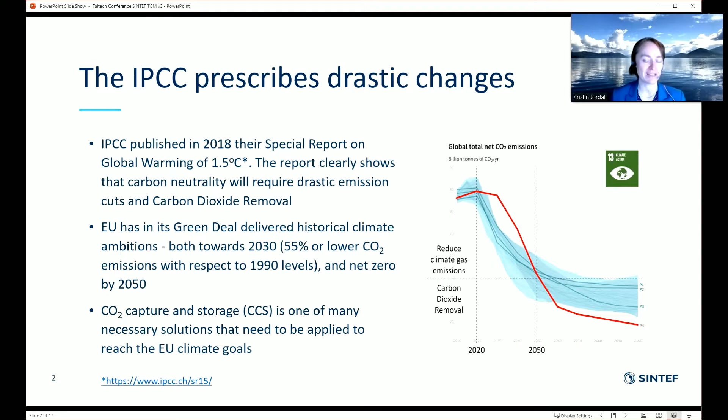One alternative that's been studied for many years is oxy-fuel combustion capture, where you modify the air to be oxygen instead when you burn, so you don't have all the nitrogen in the process. A little bit there will be. That means a combustion product of water, carbon dioxide, and some excess oxygen. You also need to recirculate some of the CO2, which makes it more complicated to control temperature. Then when you separate the CO2, the separation process requires less energy, but the oxygen separation requires energy. So it's about the same, I would say.

There are differences, but then the third pathway is what's called pre-combustion capture. In oxy-combustion, we modify the air, so we don't have the nitrogen. In pre-combustion, we modify the fuel instead. We reform if we have a gas, we gasify if we have a solid fuel, to produce a syngas, which is largely CO and hydrogen. When you have shifted it, you can remove the CO2 before the combustion, and you burn. Traditionally, you talked about burning this in a gas turbine. You need a low NOx gas turbine. These are still under development. But technologies that were developed previously for pre-combustion, you can also use now for hydrogen production with CO2 capture from fossil sources.

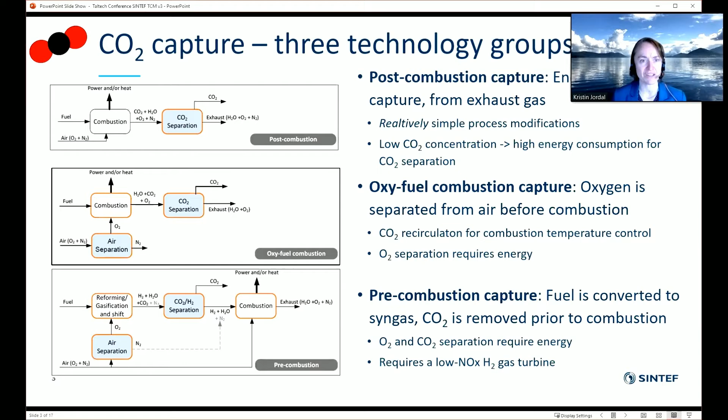And this talk will mainly be about post-combustion. We see also that post-combustion capture is really the most mature technology and what's largely being applied now. There is a project on oxy-fuel in cement industry, and there are a few others, but it's mainly post-combustion that's moving forward towards industrial scale now.

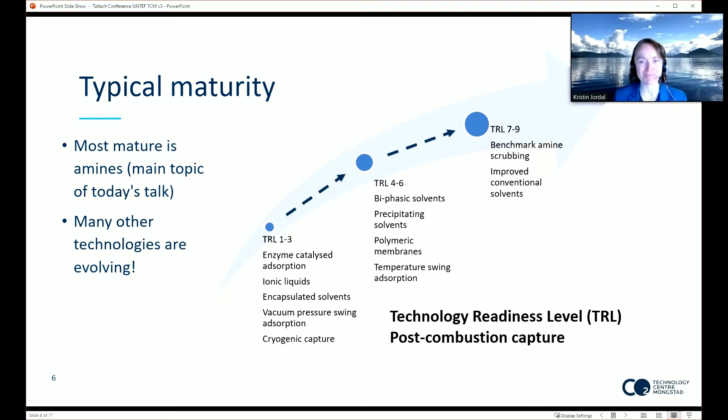So there is a lot of R&D that's been done already that's ready for harvesting, I would say, for those who are moving in this direction with their industries and to comply with regulations that are coming. A little bit more about amine capture. This is where you absorb the CO2 in a liquid, you heat it up and you desorb it again. This is the most mature capture technology of all, or the family of different amines. And several of these technologies have already been tested at TCM. Freddie will talk more about what they have done at TCM.

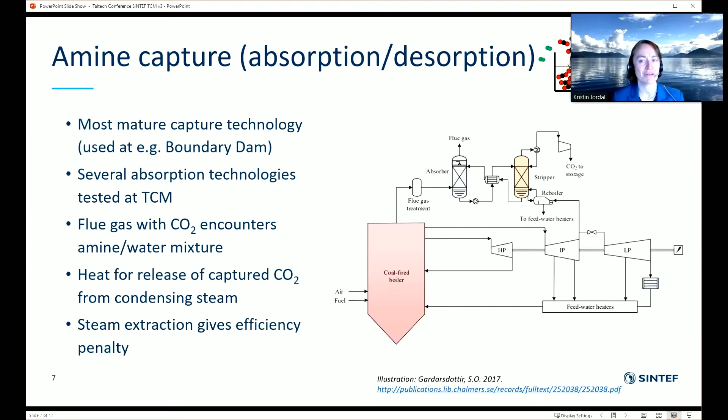And for my last slide, to show a little bit more about what lies behind that we say that CO2 capture is commercial with amines. There has been a lot of R&D going on for many, many years. We knew that this worked already before, but to really get it ready for power plants and the flue gas specific environments that we have for the industries that emit CO2.

And then we have the first full-scale power plant with CO2 capture. The CO2 capture came in operation in 2014 in Canada in Boundary Dam. For instance, we see now in Sweden that we will have a cement plant with CO2 capture, perhaps also a waste energy plant with CO2 capture operating in a few years. There are a couple of plants coming in the Netherlands and so on.

But all this experimental work always has to be accompanied, and has been accompanied, with a lot of modeling and simulation evaluation of the experimental work. So these go hand in hand, both at SINTEF, at TCM, and at many other places.

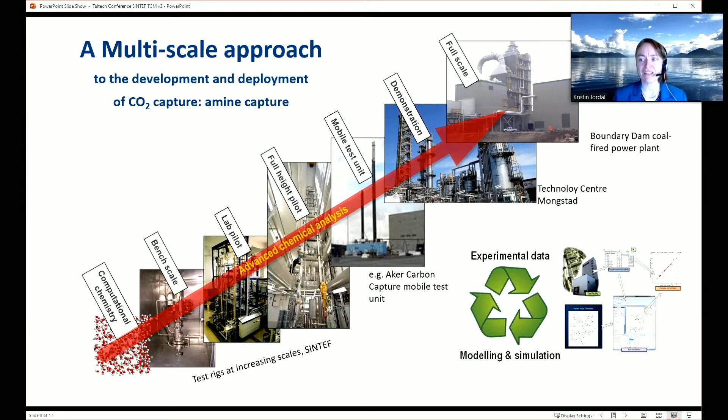Thank you, Kristin. So, as Kristin said previously, normally before going to full scale, you want to go through a demonstrator phase. Why, you may ask? Well, in reality, in the demonstrator phase, you can de-risk your site before going to the full size. How do you do that? Well, because in the demonstrator you can test the technology, you can optimize your operating modes, you can try many things and learn in a safe environment before you apply these lessons later on the real scale.

So what I'm going to do now is give you a couple examples of the lessons we have learned at TCM through the several campaigns we have run so far. And one of the main ones is that solvent hygiene is key for a good operation on your capture site. What you will see is that if you can maintain the quality of your solvent, your process will be very stable. The plant availability is going to be high.

You will be able to have low level of emissions to the environment, which is regulated by the different governmental agencies. You're going to have a high energy efficiency, which at the end of the day means that you consume less energy to capture the CO2. And overall, you're going to capture the most CO2 that you can, which is what you want to do.

You will also see that your chemical consumption will be low, and there's always some losses of solvent to the environment in the emissions. You cannot do anything about it. What you want to do is to keep it as low as possible. Why? Because at the end of the day, what you lost, you need to compensate by putting extra solvent into the system, which costs money, of course.

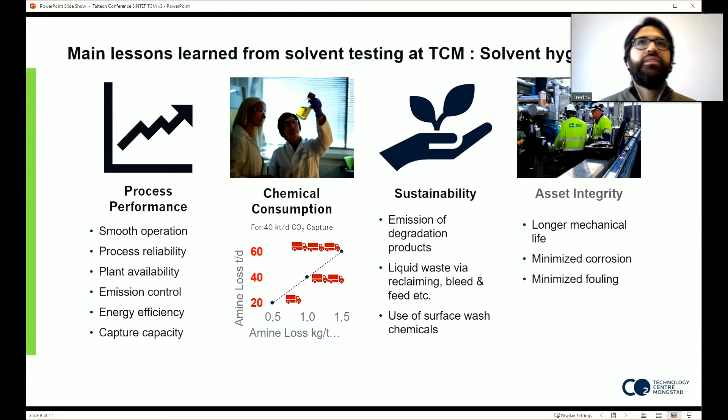If you can go to the next slide, please, Kristin. Okay, so to give you an example of that, I'm going to tell you a story at TCM. This is an actual problem that arrived on site. Let me just say first that this is the worst case scenario. This is not something you want to have in a real plant. We have this at TCM because we are built for pushing the boundaries of the operation. We want to see how far we can go in the different limits, but you don't want to have this at all.

So, solvent, it will degrade with time. There's nothing you can do about it. However, several parameters of the operation will impact the velocity at which it will degrade. For instance, if the temperature is too high, or you have too much oxygen, etc. When the solvent degrades, it's going to form some solids. We call these solids heat stable salts.

These solids will interact with your different equipment. It will dissolve the metal, causing a problem of corrosion. And then this metal will interact with the solvent and accelerate the degradation mechanism, which in turn will cause even higher corrosion. And like that, you enter a downward spiral that will end up in having to shut down the facilities for a certain period of time. And you don't want to do this. Next slide, please.

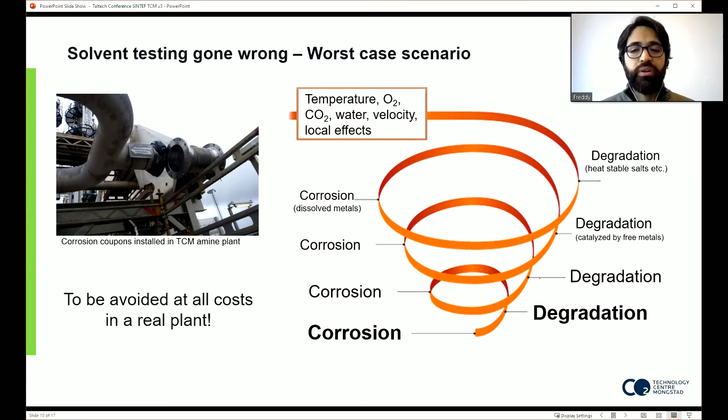So the good news is that this can be avoided, and it's quite simple to do actually. Basically, what you have to do is monitor the operation. You have to have a monitoring strategy. So first, you need to know which parameter to look at. You need to know how to measure it with an analytic technique, with an instrument, in which location you want to measure it, and the frequency.

So part of the test at TCM has been to try to find an equilibrium between all these, trying to find the optimum monitoring strategy, between very frequent monitoring, which is going to be very expensive in manpower and in chemicals, so in OPEX, and too low monitoring, in which case it will be useless. Okay, so this is the first thing to do. You have to have a good monitoring strategy.

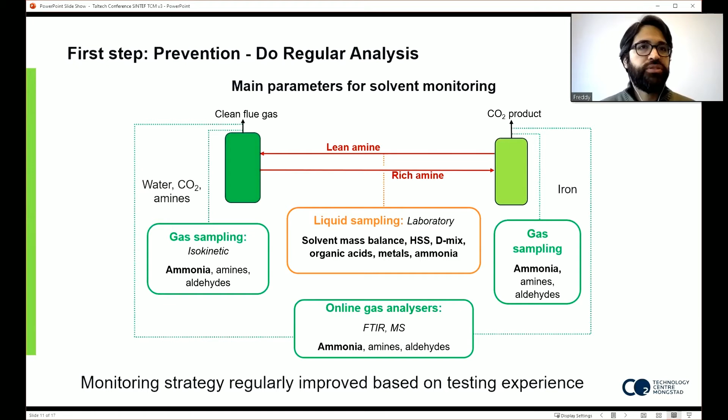Next slide, please. So let's assume that you have a good monitoring and you start seeing things that start changing. The first thing to do is just to go into your plant parameters and see if something has changed. Well, if it hasn't, maybe it's a normal degradation of the solvent. In that case, you want to take the necessary corrective measures as soon as possible. The sooner you do it, the less expensive it will be for your operation. So you start doing what we call reclaiming.

So in a nutshell, you take your solvent, you concentrate all the impurities in one part of your solvent, and this one is going to be very dirty, so you dispose of it in a safe manner. The rest of the solvent, the majority of it, will be cleaned, and you can reuse it. You can put it back into the system and just add a little bit of fresh solvent to compensate for the losses. So it's going to cost you money, but not so much.

Now, if it doesn't work, what's going to happen? Well, that's what we had to do at TCM. You need to change all the inventory of solvent at the same time, which is going to cost you a lot more money. And at the end of the day, if not even that works, you say, well, it's too late. There's nothing to do. I'm going to apply the last resort, which is a full plant cleaning. So basically, you take out all your solvent, you throw it away, you flush everything, and then you start doing chemical washing, which is basically adding some acid into the system.

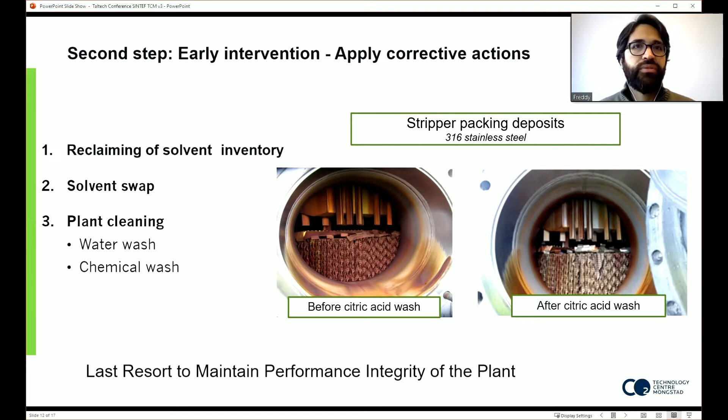And then you start asking yourself, what is the concentration of the acid I'm going to be using? Which one? Because if it's too corrosive, you're going to destroy your facilities. So this is something that has also been tested, how to do these kinds of operations. I give you some pictures on the slides of the situation before the acid wash and what we had at the end. As you can see, the difference is quite significant. Next slide, please.

Another lesson, a different one, is about the pretreatment of the flue gas. So at TCM, we have two sources of flue gas. One that we call the dirty one. This has a lot of particles in it, right? So at the very beginning of the plant, we had a very simple pretreatment of this to remove what we could, a cyclone, pretty standard, nothing fancy.

So what we saw when we started to use this gas is that we couldn't maintain an acceptable level of solvent emissions to the environment. It was even above what we were allowed. So we had to stop the operation. And we couldn't see the relationship between those two. We weren't even sure there was a relation.

So the conclusion is you need to know your flue gas very well in order to have an adapted pretreatment for your facility. Next slide, please.

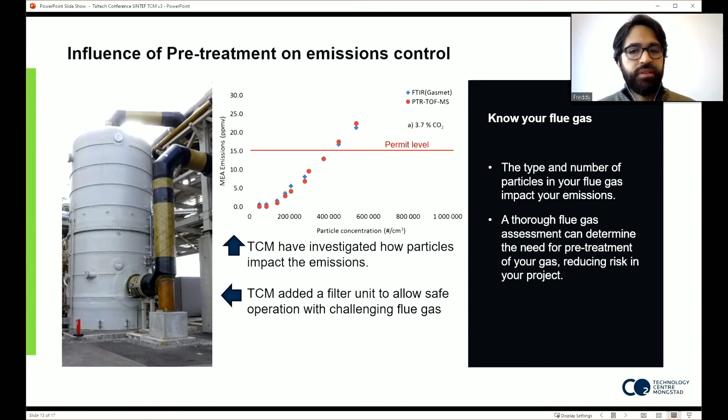Yeah, so you have seen a couple of lessons we have from TCM; there are many, many more. We have been learning this in the past campaigns. At the time, the focus of the tests was to mature the different technologies, to bring them all the way up to TRL 7, 8, 9 to be able to deploy them on an industrial scale. So for those technologies, the big chunk of the work has been done. There's still some R&D going on, but the focus has shifted a little bit.

Now the focus is more on how to reduce the capture cost. And one way of doing this is to optimize the way you integrate your capture plant with a specific industry, because a waste-to-energy plant is not going to be the same as a coal power plant. It's not going to be the same as a steel factory. So by playing with the integration of the capture plant with your application, you will improve the reliability of the operation. I'm going to give you a quick example on that. If you could go to the next slide, Kristin, please.

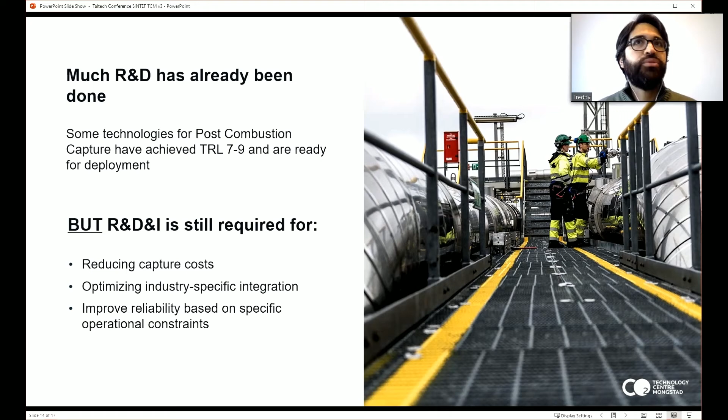So this is a power plant case. As you know, now everybody talks about putting more and more renewables into the power grid. When you do this, the amount of energy you put into the grid is going to change a lot depending on the day, if you have too much sun or too little, too much wind or too little. So you need to compensate for this because the power demand is going to be constant.

So one solution is to add gas power plants into the system. These power plants have the advantage of being quite flexible. You can turn them up and down, shut them off really fast, and they adapt to these kinds of instabilities on the grid. However, this is actually their business model. They need to be flexible.

And today, and in the future even more, when you put in a new gas power plant, you're probably going to want to also install a capture site associated with it. But what will never be accepted is that the capture site adds constraints to the operation, to the flexibility of the power plant, because the actual business model depends on that. If it does, it will no longer be profitable.

So a lot of the focus has been on how to coordinate those constraints, how to be able to start up your capture plant really fast, how you can accept that the load coming from the gas turbine is going to change a lot. Maybe accept that it won't be 90% capture all the time; sometimes some trains will be lower, but still acceptable, and it's going to be reliable. So we're all trying to minimize the start-up time of the capture site.

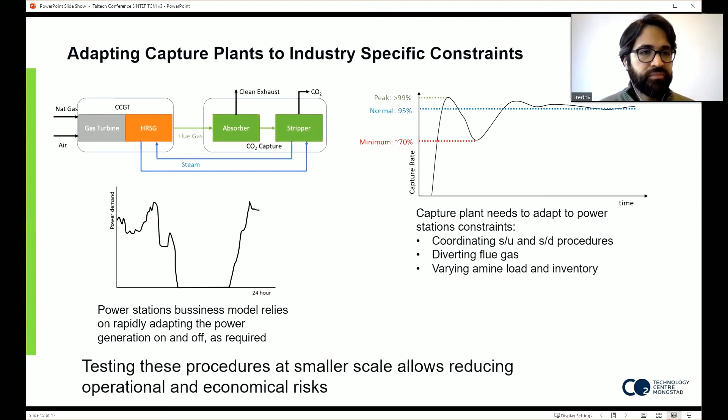And this kind of test, of course, you want to do it on a demonstration scale. You don't want to do it in a real site. Why? Because on the other side, there's actual users that require the electricity, and you need to be able to provide those. So you test in a demonstration in a safe environment, and then you apply them to the real site.

Next slide, please. So you have seen there is a lot of knowledge available on carbon capture. So we know which technology works, we know how to build the plants, we know how to operate it. However, the success of each implementation is going to depend first and foremost on choosing the right technology for the right application. So for that purpose, you need to be able to answer this question. Typically, you need to know your flue gas, as I said previously. You need to know what's the pressure and temperature of the flue gas, what's the concentration of CO2, what's the composition of the impurities.

Do you have energy available on your site? Is it going to be a new site, or is it going to be an existing one that you want to adapt? In that case, maybe you have some space constraint. You cannot put whatever you want. You have a smaller place, so you have to choose a smaller technology.

And then you need to know what you're going to be doing with the CO2. Are you going to store it in place? Are you going to transport it? Are you going to use it for producing something else? And in that case, does it include some constraint like you need to be very clean or dry, a certain level of pressure, etc.? So that's the kind of question that usually we help the industry answer when they come see us with advisory services. And with that, I finish our presentation and we'll be happy to answer any question you may have.

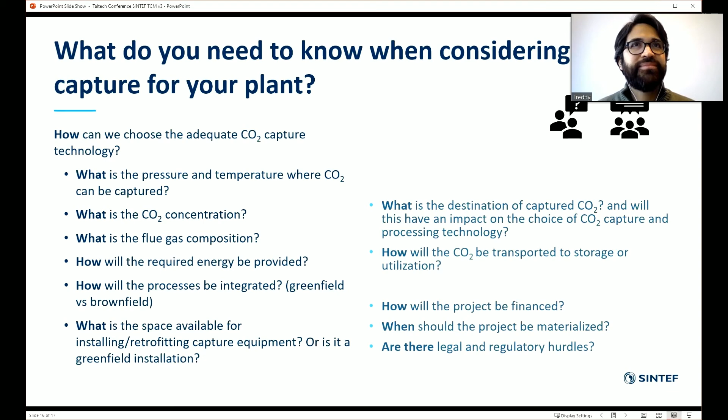But I think the Allam cycle is a question of scale also. You can't scale it up very big. So maybe it could be useful for CCU processes because they won't be very big either in the first rounds, I guess. But I'm not up to date on the Allam cycle, so I can't answer more than that. I don't know if you can say something more, Freddie. No, I don't know much about it, no. Well, so there you have it.

Do you know the largest scale that the Allam cycle has been applied to date? No? No. I think the work has been done mainly in the US, right? I haven't followed that one for a couple of years. I should catch up on it. Yeah, to my knowledge, there was some plant in Texas. It was commissioned in 2018, but I don't remember the capacity either. So, sorry, Waldur. Next one.

The question would be, CO2 storage versus utilization, which would be more beneficial for human society in the future? Or can you prefer one to the other? I would say you have to look at the quantities. Because there's more than enough CO2 for everybody who wants to do CO2 utilization. It's going to require a lot of energy to break up this very stable CO2 molecule and make products out of it. And I just don't think we have enough renewable energy to do this on a large scale that can contribute to really combating global warming.